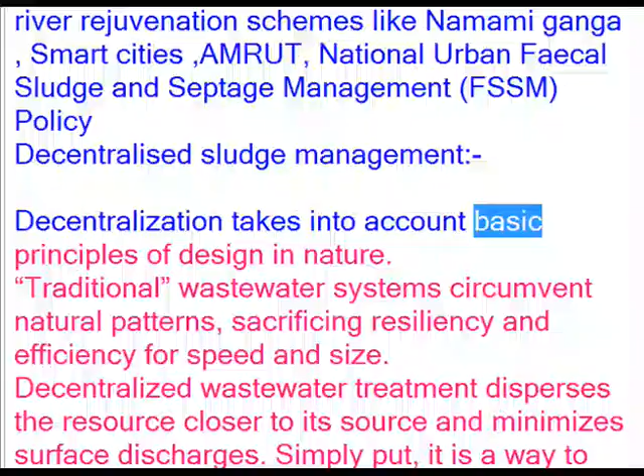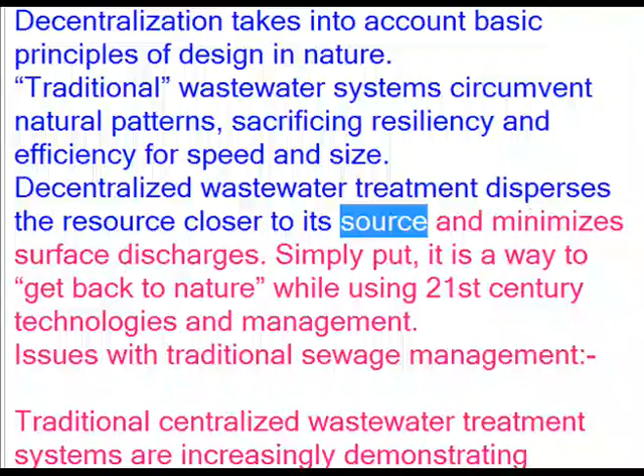Decentralized sludge management. Decentralization takes into account basic principles of design in nature. Traditional wastewater systems circumvent natural patterns, sacrificing resiliency and efficiency for speed and size. Decentralized wastewater treatment disperses the resource closer to its source and minimizes surface discharges. Simply put, it is a way to get back to nature while using 21st century technologies and management.

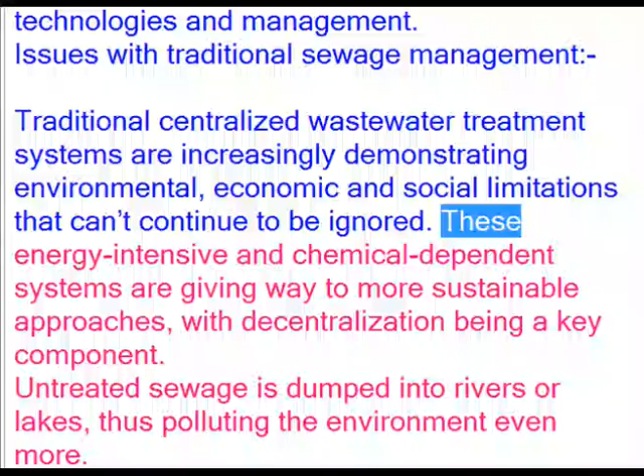Issues with traditional sewage management. Traditional centralized wastewater treatment systems are increasingly demonstrating environmental, economic, and social limitations that can't continue to be ignored. These energy-intensive and chemical-dependent systems are giving way to more sustainable approaches, with decentralization being a key component. Untreated sewage is dumped into rivers or lakes, thus polluting the environment even more.

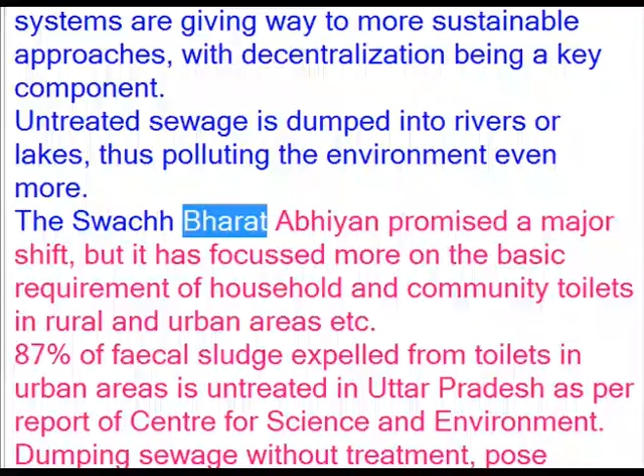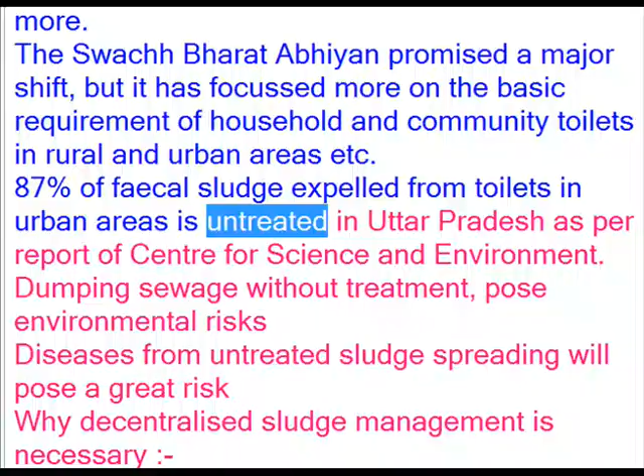The Swachh Bharat Abhiyan promised a major shift, but it has focused more on the basic requirement of household and community toilets in rural and urban areas, etc. 87% of fecal sludge expelled from toilets in urban areas is untreated in Uttar Pradesh as per a report of the Centre for Science and Environment. Dumping sewage without treatment poses environmental risks. Diseases from untreated sludge spreading will pose a great risk.

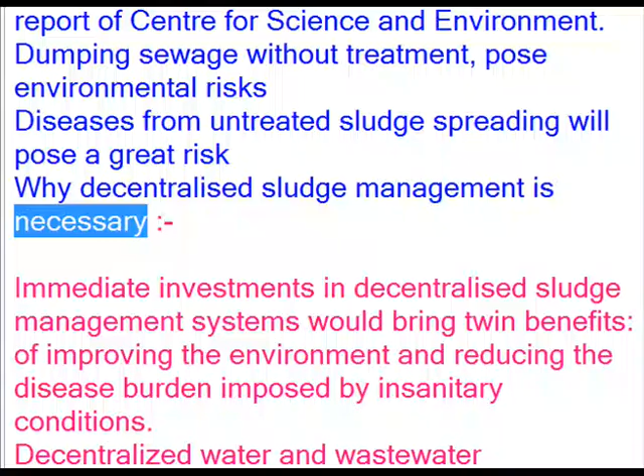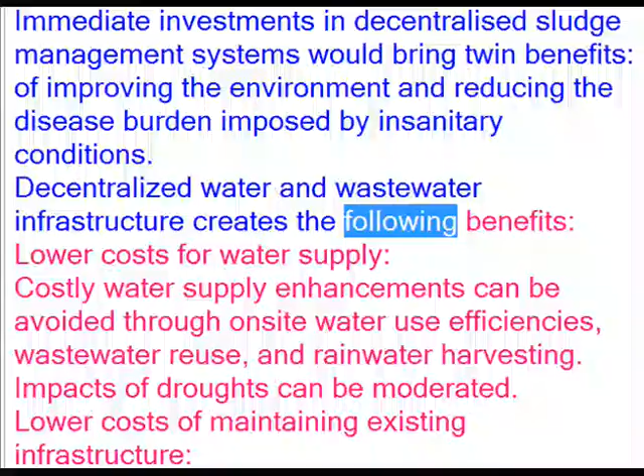Why is decentralized sludge management necessary? Immediate investments in decentralized sludge management systems would bring twin benefits of improving the environment and reducing the disease burden imposed by unsanitary conditions. Decentralized water and wastewater infrastructure creates the following benefits. Lower costs for water supply. Costly water supply enhancements can be avoided through on-site water use efficiencies, wastewater reuse, and rainwater harvesting.

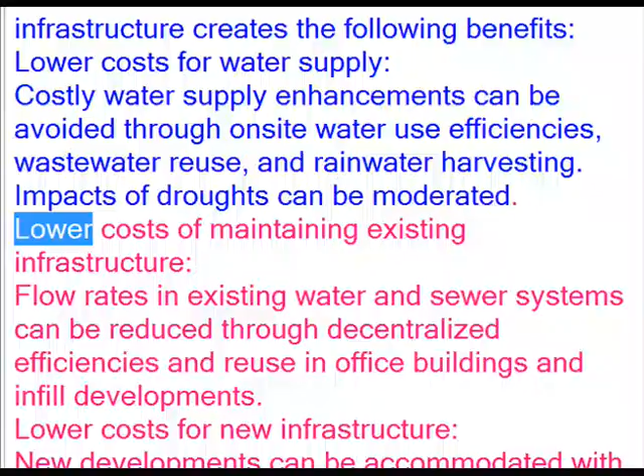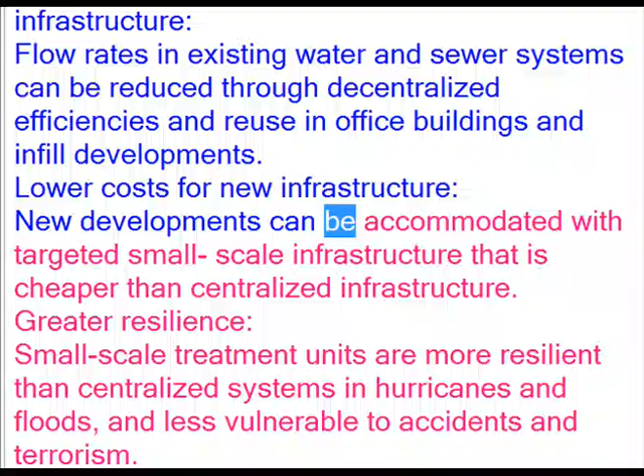Impacts of droughts can be moderated. Lower costs of maintaining existing infrastructure. Flow rates in existing water and sewer systems can be reduced through decentralized efficiencies and reuse in office buildings and infill developments. Lower costs for new infrastructure. New developments can be accommodated with targeted small-scale infrastructure that is cheaper than centralized infrastructure.

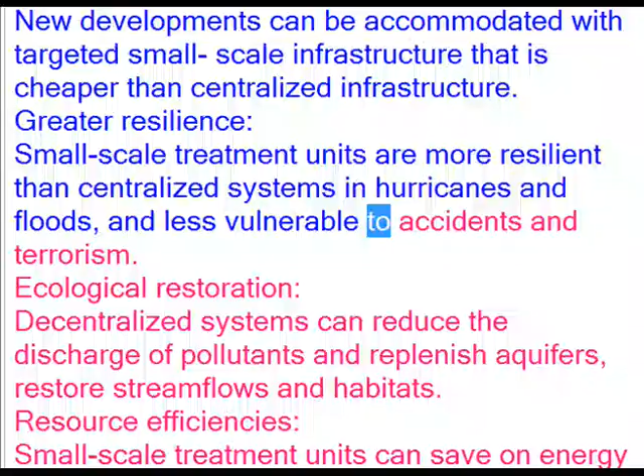Greater resilience. Small-scale treatment units are more resilient than centralized systems in hurricanes and floods, and less vulnerable to accidents and terrorism. Ecological restoration. Decentralized systems can reduce the discharge of pollutants and replenish aquifers, restore stream flows and habitats. Resource efficiencies. Small-scale treatment units can save on energy costs and recycle nutrients into landscaping and agriculture.

Community benefits. Green infrastructure has been shown to improve air quality, preserve open space, and create local jobs. Private financing. Small-scale treatment units on individual properties can be financed privately, thereby saving money for municipalities.

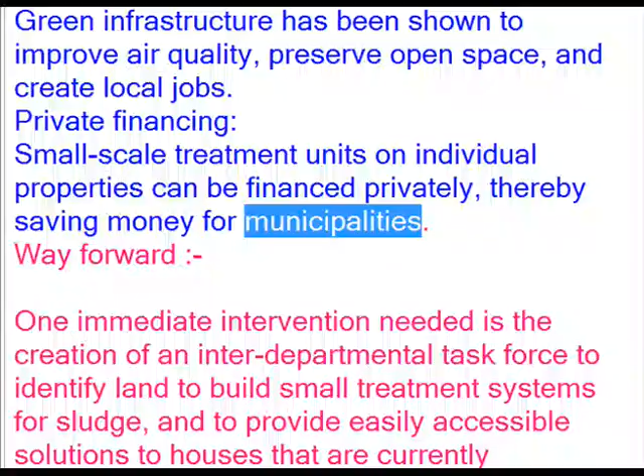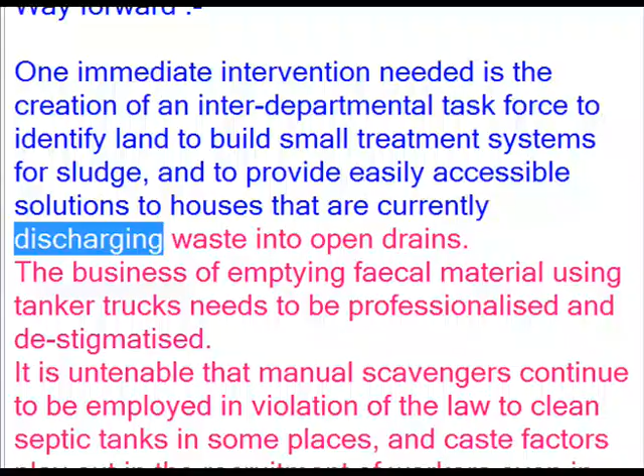Way forward. One immediate intervention needed is the creation of an interdepartmental task force to identify land to build small treatment systems for sludge, and to provide easily accessible solutions to houses that are currently discharging waste into open drains. The business of emptying fecal material using tanker trucks needs to be professionalized and destigmatized.

It is untenable that manual scavengers continue to be employed in violation of the law to clean septic tanks in some places, and caste factors play out into recruitment of workers even in the mechanized operations. This needs to change. All aspects of the business of sanitation need reform if India is to meet goal number 6 of the Sustainable Development Goals.